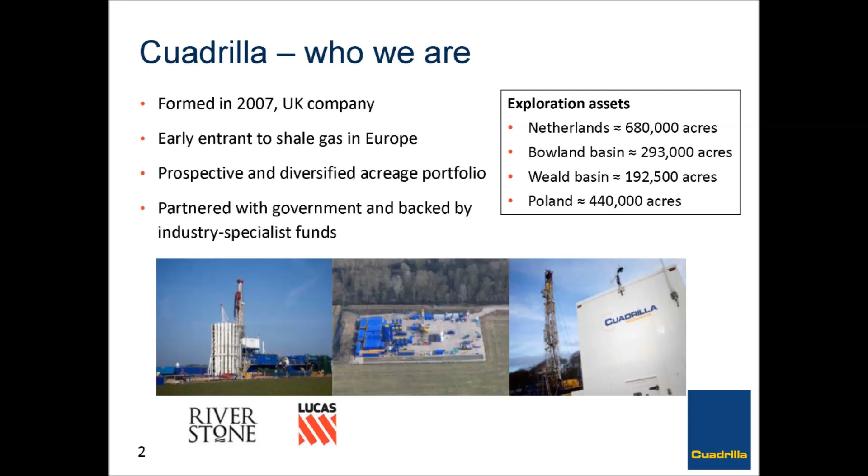Just briefly, I'll talk a little bit about what is unconventional gas or shale gas, why we are primarily focused on the Bowland Basin, a little bit on operations like drilling and fracturing, some of the environmental concerns and questions, and then a little bit on the economics.

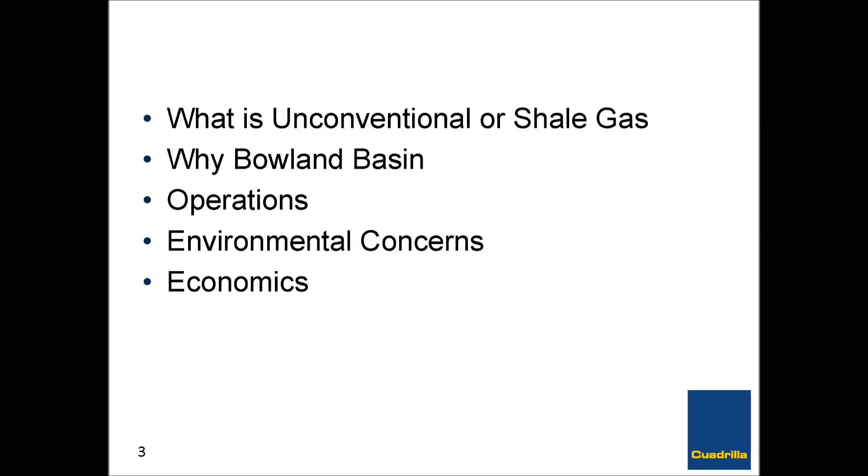So what is shale gas or unconventional gas? A methane molecule from a conventional gas well, if it came from the North Sea or one of the onshore fields, and the methane molecule from a shale gas well, it's the same thing. Shale gas is just natural gas. It just came from a shale formation instead of a sandstone or a carbonate. Basically, the reason it got its title unconventional isn't the gas itself, and it's not the way we drill or fracture or anything.

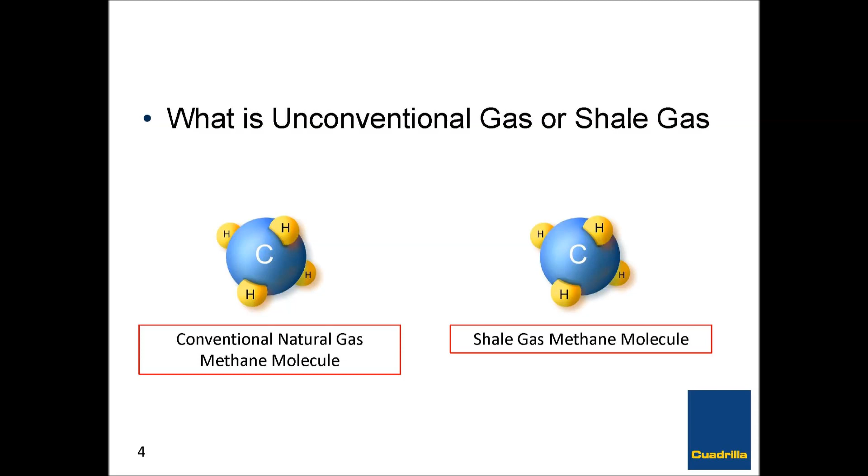That is not what makes it unconventional. What makes it unconventional is the source, the rock itself. So the geologists will know this is just a picture of a traditional trap that you would normally capture oil and gas in. There'd be some type of sealing rock.

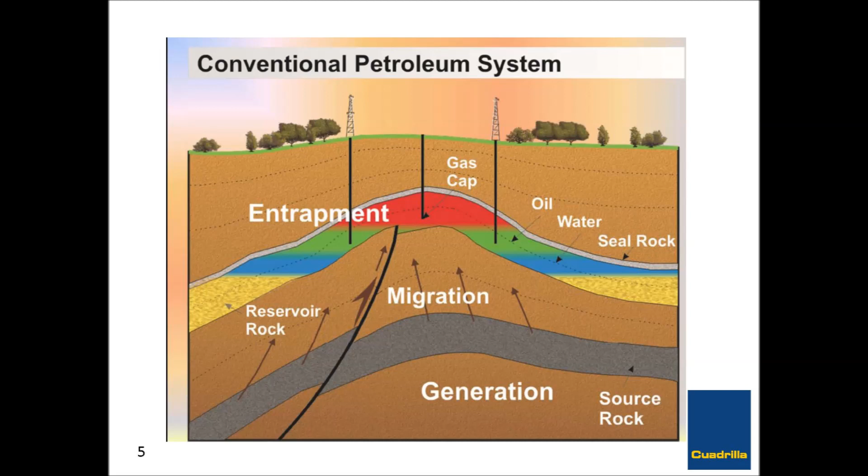The oil and gas would migrate from the source rock, which is usually something like a shale, and over geologic time it would get stuck up there, and a traditional well would drill into that, into a more permeable and more porous formation, whereas with shale gas, we're basically going after the source rock where the oil and gas was actually formed.

Just a quick picture of some shale and a methane molecule kind of to scale inside the matrix of the shale. Shale is extremely tight. Pavement stones outside are more permeable than shale, which is one of the reasons that traditionally they didn't produce gas or oil from shale. So it took us a long time to figure out how to create permeability in the shale so that we could get the oil and gas out.

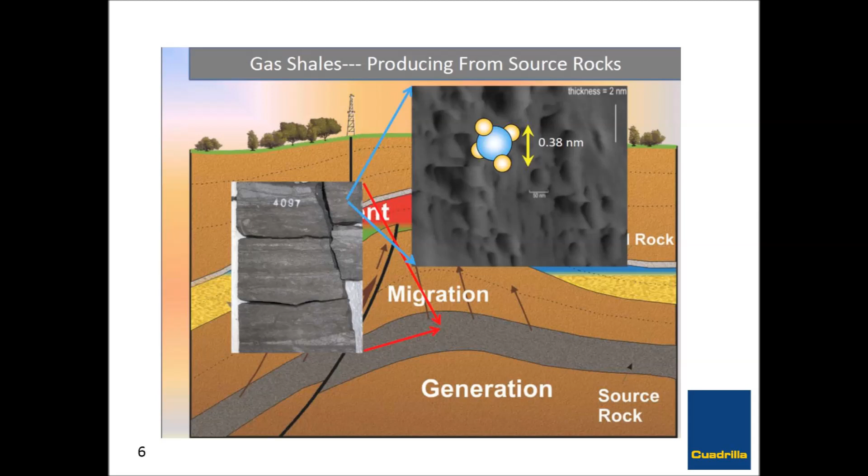Why do we target the Bowland Basin? If you look at the BGS study, this is from the BGS study of the shale gas resources in the UK, and our license is this section up here. So that's our Bowland Basin. That's where we've drilled the wells so far.

It's basically Blackpool and Preston there, and all these black boxes are the existing oil and gas licenses that are already established onshore in the UK. A lot of those are for either coal mine methane or coal bed methane, but there's some traditional oil fields and gas fields in there too.

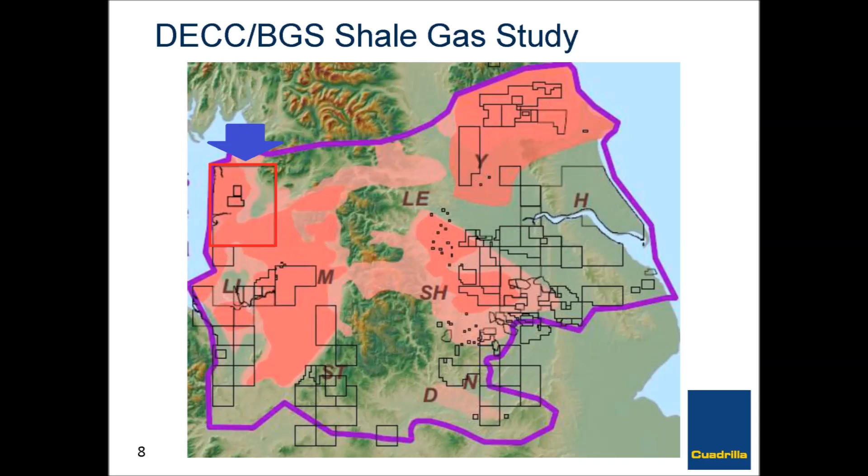This is just our license area. We picked it because it has the correct geology, so we knew that the shale was there. There was a lot of old 2D seismic that was run there. The age of the shale is correct. The depths that we thought before we drilled, from the public data that we could glean, are about right.

There were 4 wells that had already been drilled within this area. 2 of them had already penetrated the shale, so we could see the shale was there. We could see the gas contents and actually see some of the cores. And of course, there's a history of oil and gas production in that area. To the southern end, you can actually see one of the Formby wells there. There's an oil field in the southern part there. And then, of course, there's the oil and gas coming offshore.

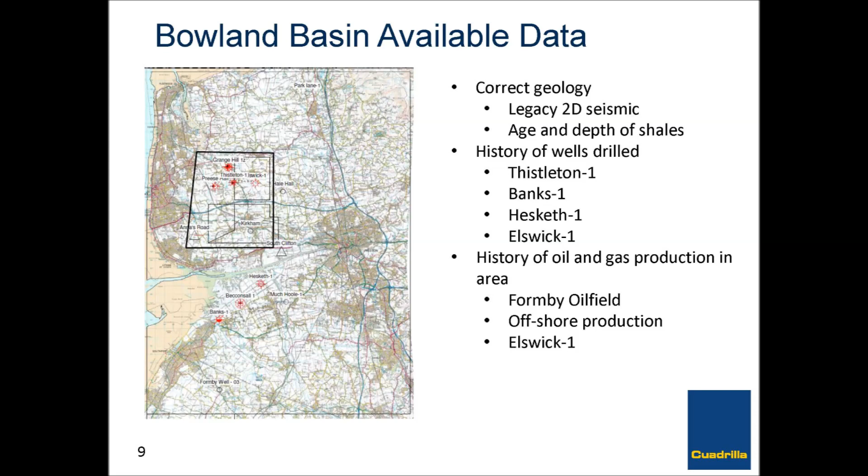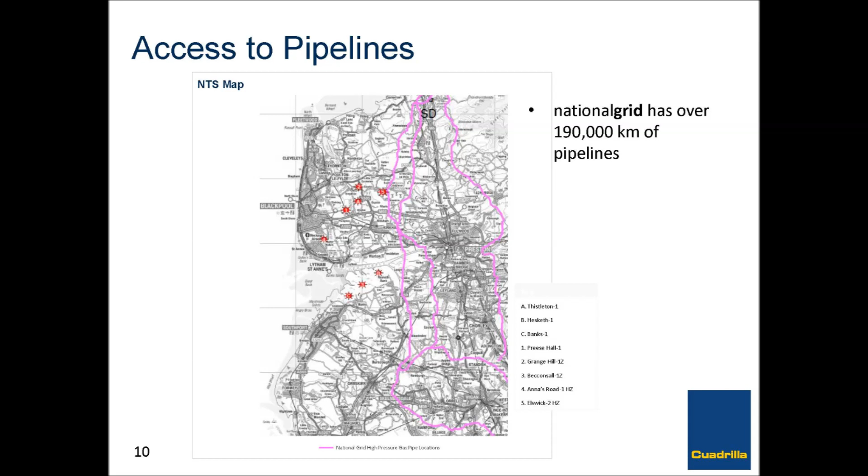One of the other key reasons is there are pipelines that run right through the middle of that license. Those are part of the national gas grid that loops around the country. So if we can produce gas from these wells, it's not too far to any of the pipelines to get it into the grid.

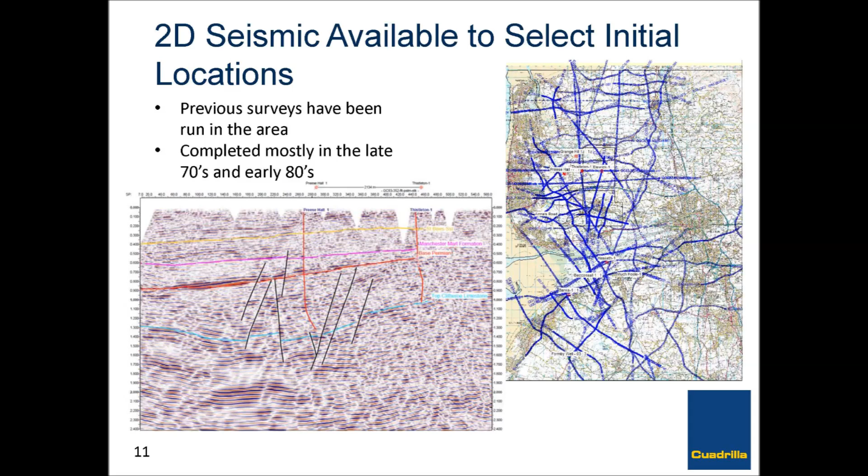There's just some of the old 2D surveys. And the blue lines on all that, those are all the 2D surveys that were done in the area, mostly in the 70s and 80s, I think.

Quick little bit on operations. So what we've done so far is drilled 3 wells, mostly around 10,000 feet, a little over 10,000 feet, to test mostly the Bowland shales. We've only had 1 well that penetrated the Bowland and went into the Hodder mudstone, which is a shale underneath the Bowland. We've also acquired about 100 square kilometers of 3D seismic, which gives us a lot better picture of the rocks. Some of the old 2D stuff, even with reprocessing, is still not the best quality.

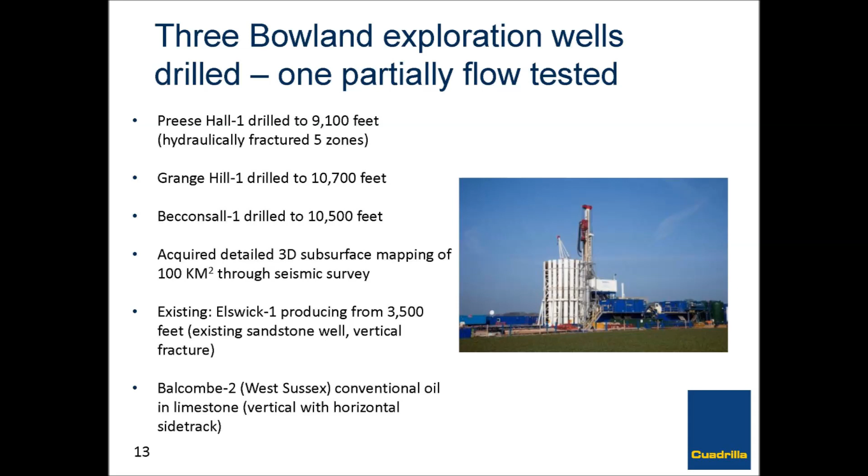And then the 1 well that was drilled back in the 80s, the Elswick well, is still producing a little bit of gas, and we've acquired that in the middle of our license there too. And then of course we have the well down here, which is different. It's not a shale gas well. It's a conventional oil well in a limestone.

So here are some pictures of the shale. So this is what shale looks like for the non-geologists here. One of the things that we look for in a shale gas well are some of the natural fractures. The problem with shale is it's too dense, it doesn't have any permeability, and really the only way to produce the gas or oil from it is to have a fracture network through it. We can only generate so much of a fracture with hydraulic fracturing. There has to be some type of natural fracture network in there too.

So the white bits in there, all this is some of the natural fracturing, and where basically calcite has formed in the natural fractures over time. One of the other things that we really look for is for those fractures to be going in different directions.

And you can see when we take cores, when we drill these holes, the wells that we've drilled so far are basically vertical holes, and the purpose is really to get the rock back to surface and look at it and measure how much gas is in it, how much organic content is in it, all that stuff.

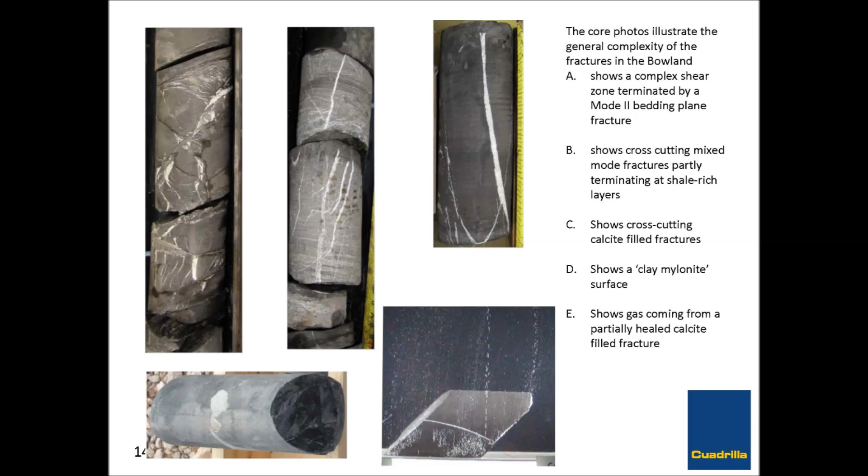But if you take the cores of this rock, to most people, if you look at the rock, you would never imagine anything comes out of it. But if you take it, stick it in a tank of water at the formation temperature, you'll see streams of bubbles start coming out. This one actually isn't even a very good sample.

So as I mentioned a little bit ago, we have been in the news. You see things about Cuadrilla, and you see things about other companies now. A lot of things on hydraulic fracturing, and usually you see pictures like this saying fracturing is coming to town. None of these pictures have anything to do with fracturing. Those are all drill rigs.

So whether a well is being fractured or not is independent of the drilling. This could be a geothermal well, it could be a conventional oil and gas well, it could be a deep water well. The rig itself is actually used for water wells in some areas of the world. So you see the article, and it has that. Fracturing has become this catch-all term for basically anything to do with oil and gas now.

And so it's interesting to someone that's been doing fracturing for over 30 years, and then you see something like that, it's like, well, that's not fracturing. I actually talked to a guy that has been a driller for 30 years, and he came up to me one day and said, for the last 30 years I thought I drilled wells, but apparently I've been fracturing.

The fracturing in the UK has been going on for quite a while, actually. Now the fracs changed. There's lots of different types of fracs. You wouldn't use the same frac in a shale gas well as you would in, say, a small carbonate or a tight sandstone well. So the picture of this frac was back in 1992. This is when I first came over and started doing fracs here in the UK.

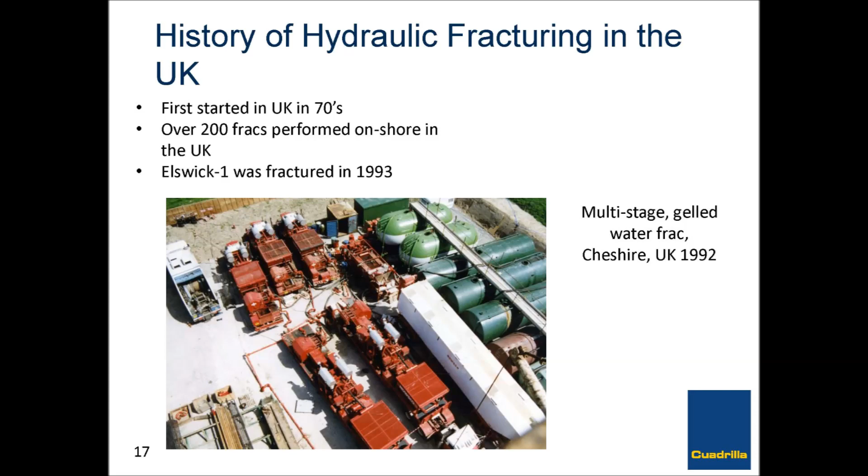The fracturing process itself, especially on high volume water style fracs that you do on these shales, is really just a big water moving exercise. We're pushing water down the well, and then out through some small holes in the pipe at enough pressure that it cracks the rocks, and especially where there's natural fractures in there, it'll start to follow those. And we're filling those cracks with sand, just silica sand.

It's actually mined here in the UK. So when we relieve the pump pressure, we stop the pumps, then when those fractures try and close back up, they can't close all the way, the sand's in the way. It squishes a little bit of the water back out, and then gas or oil can flow back to the wellbore.

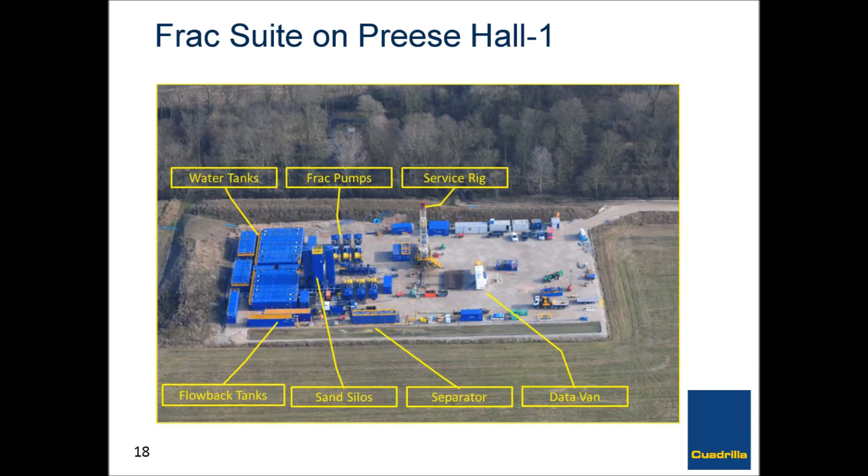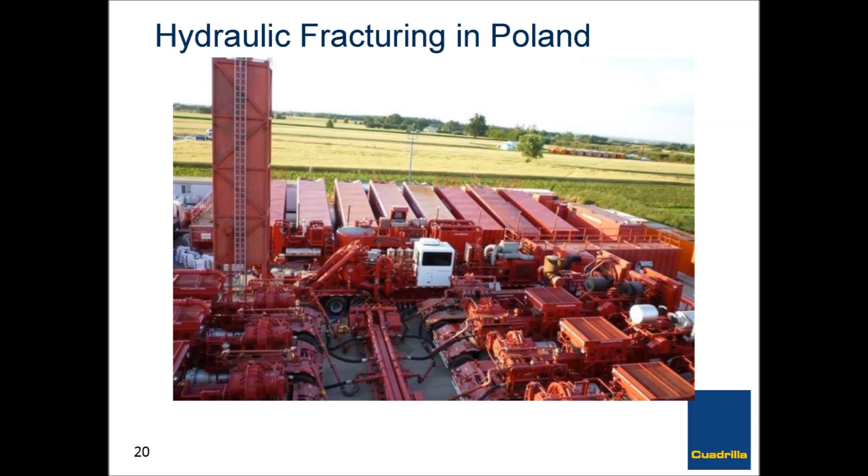And then here's a picture of North America. So one of the things that comes up all the time is you can do this in North America because you're in the wide open spaces, there's nobody around. So this is a frac just outside of Fort Worth, Texas, which is actually the home of modern shale gas development. So the county in Texas where they had started the modern shale gas is Tarrant County, Texas. It actually has a higher population density than Lancashire. So sometimes it is done out in the middle of nowhere in the U.S., but not always.

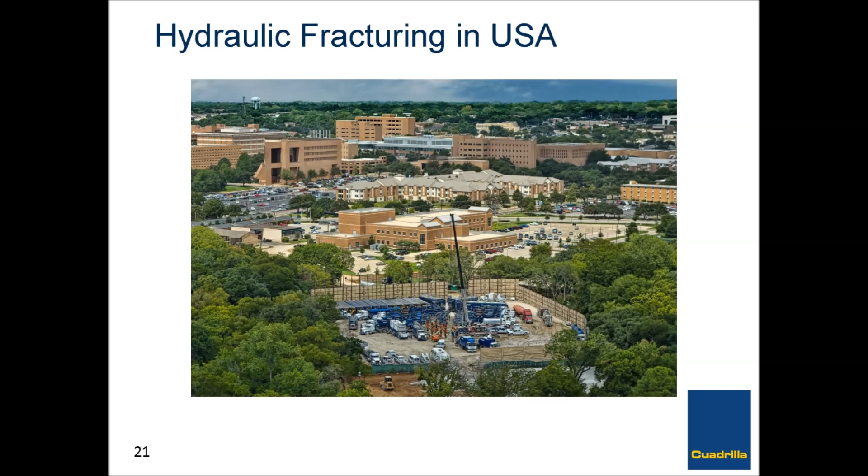When we do the fractures, a lot of people want to know where they go, how long are they, how tall do they get, and how do you know? Like, how do we know that the fractures aren't growing thousands of feet vertically and going up someplace where they can contact the water table? So one of the ways to do that is we can monitor them. It's basically called microseismic monitoring. We can monitor the microseismic activity. When these rocks crack, it makes enough noise that you can pick that up through either downhole arrays or from near surface arrays.

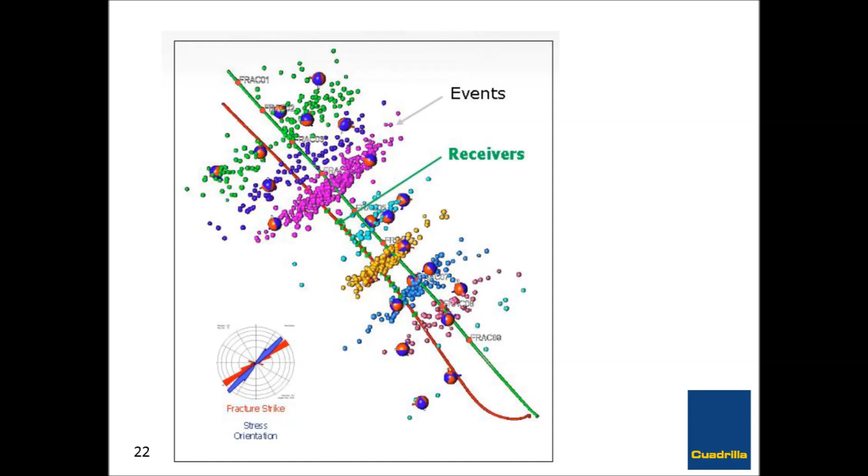So once you get to a certain shallow depth, the stress on the rock is such that if we inject in, instead of making a vertical crack in the rock, it's easier just to separate the layers and it'll just open that way, so you have a horizontal fracture at that point, which is one of the reasons it makes it very difficult for fracs to travel up to really shallow depths where say an aquifer is or something like that.

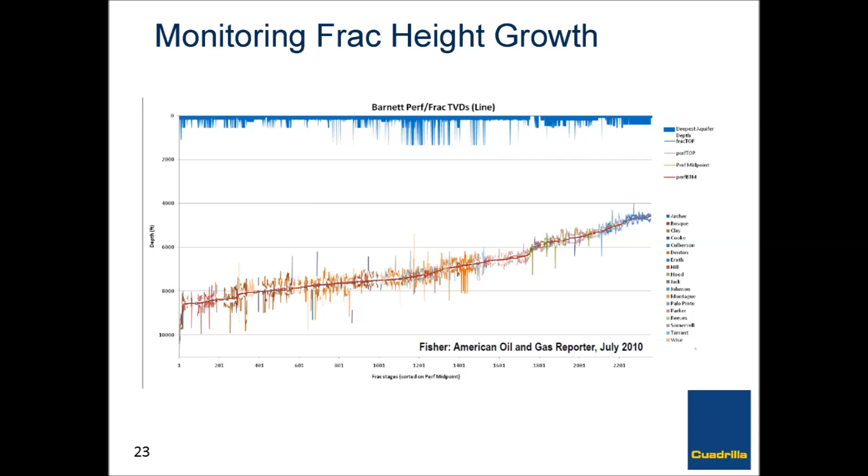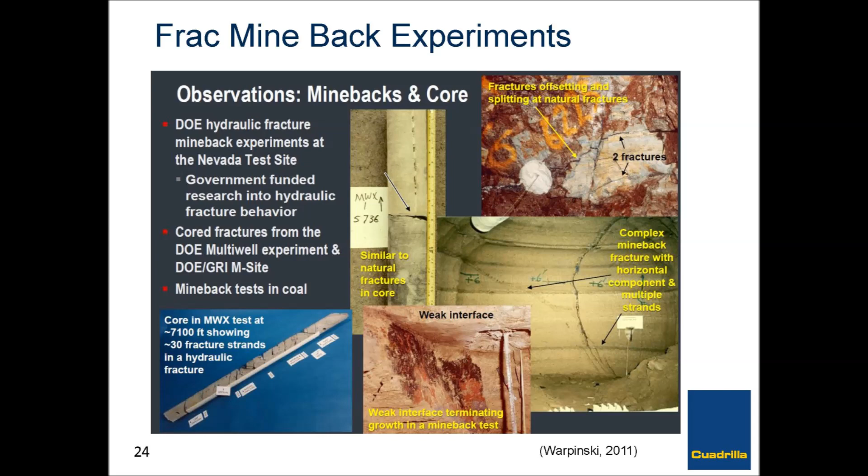Of course, we do a lot of stuff on water. And we hear lots of things, oh, fracturing is going to contaminate the aquifer, and taps are all going to set on fire. I mean, one thing, if you're on mains water, I can promise you your tap would never set on fire from hydraulic fracturing. Okay? There are some places in the U.S. that you can do that. You can light your tap whether there's hydraulic fracturing going on or not, but those are all people that have pretty much individual water wells that are coming straight into their house.

A lot of places, especially in Pennsylvania, some areas in Colorado, lots of areas where there's coal, there's already methane in the water, and normally when you put a water well in, you put a methane vent on it to keep it out of your house. But in reality, the depths that we work at in shale, the fractures that we create in shale, there's just no way they're going to come back up into a shallow aquifer.

From the measurements that we've seen, from the mine backs, we hope that a frac will extend a couple 300 meters away from a well bore, because the farther that goes, the farther apart we can put our wells, which means the fewer number of wells we have to drill, which of course is cheaper. And unfortunately, we can't get the fracs to go far enough that we can put the wells really far apart. If you can get a couple 100 meters each direction away from a well, you're actually doing pretty good.

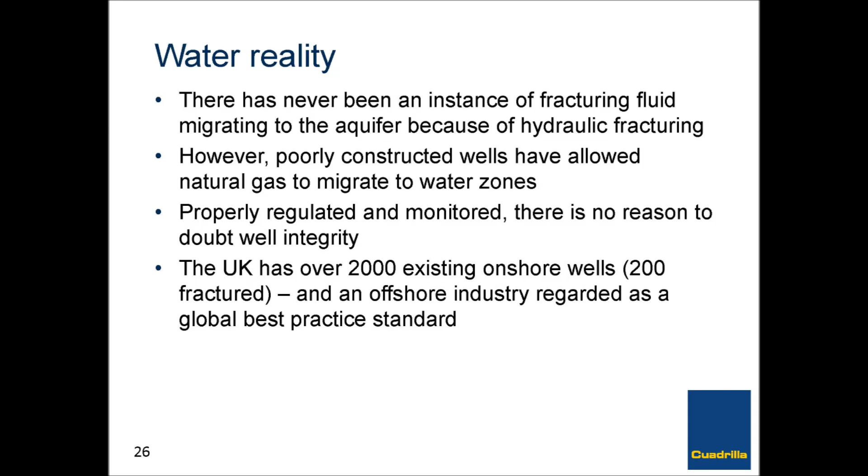The water that we use for fracturing, what we've used so far is just mains water, and one of the reasons for using mains water is it reduces the truck traffic. If you're on a site, you can get a mains line going into it. You don't have to truck any water in. It reduces truck traffic, makes us happy because it costs less, makes everybody around happy because there's less truck traffic around the site.

One of the other good things about mains water is it's already been treated for bacteria. One thing you don't want to do in an oil and gas well is put a bunch of bacteria down there, because they really like it and they can actually plug up your well. And so normally if we're using other water, then you would treat it with some type of biocide, just like they usually do with drinking water. You don't have to use drinking water. Again, it's basically because it's more convenient, and if it's available, we can use it.

You can use water from streams, you can use ponds, you can use seawater. I've used the effluent from wastewater treatment plants. It doesn't have to be perfectly clean water, you just don't want to have any bacteria in it. And for the type of fracs that we're doing, it's called a slick water frack, which basically means we're putting some type of friction reducer in water. It's one of the styles of fracs, I would say, that uses the least amount of chemicals.

And so the only thing that we're really putting in there is a polyacrylamide, which is just a long chain polymer. It's non-hazardous. And what that does is reduce the friction of the water as we pump it in down the pipe, so that it doesn't take as much pressure at surface, and it doesn't require as much pumping equipment at surface to push the water in.

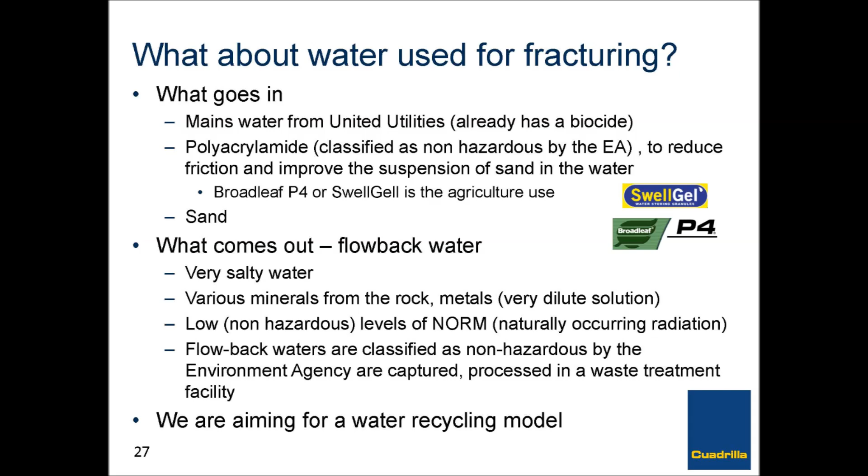Of course, you had the report from here, looking at the scale of shale gas and what would happen if this industry actually takes off and develops, and looking at the water use on that. And although we sort of have this reputation that we're going to use lots and lots of water, in the big scheme of things and in industrial use, it's not really that much. It's less than 1/10 of 1%.

Now, certain areas may have different water use restrictions than others. So in some areas there isn't very much drinking quality water. So if you can use brackish water or produced water from a well that wouldn't meet human consumption standards, we can use that water. Or like I said, seawater, effluent from the treatment plants, that's fine too.

One of the other things is you have to look at the other things that would use the water instead of shale. If shale gas or natural gas replaces coal, you actually use less water. Just to process the coal, not counting the actual power plant, but just mining the coal and cleaning the coal and sending it to the plant uses a lot more water than the same energy output you get from a gas well. And actually nuclear uses more water.

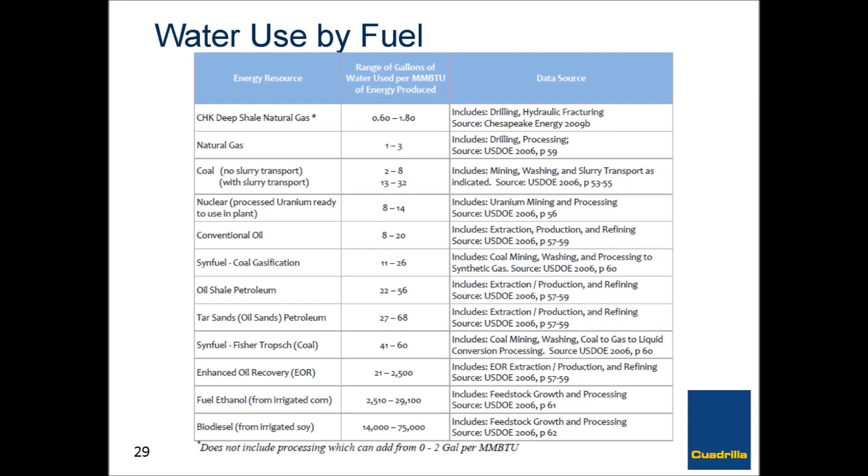And a little bit on economics, and also on why it's important to have natural gas, or in this particular case, natural gas from shale or shale gas.

One of the things that's happening here right now is the North Sea is on a pretty steep decline on natural gas and oil, and I think we're importing, it's like what, 50%? Is 50% the right number now? 50% of the natural gas right now is being imported. And that's expected to grow up to, I've heard 70 to 80%, depends on what study you look at, between 2020 and 2030.

And I think they said some bit on TV last night, and you hear in the newspaper and on the news, we've got to keep the lights on, and we have these issues with the power demand. And one of the things that's also happening here is instead of getting cleaner and greener with the energy, it's actually going the other way. What's happening is we're burning more and more coal.

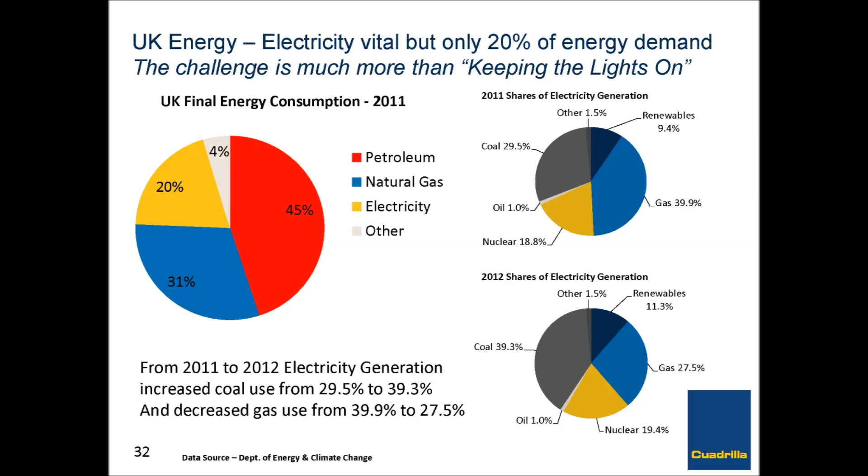So most of the gas is not used for electricity. Roughly, depending on the year and the number, it's a third for electricity, a third direct to homes for heat, and a third for industry. It's kind of a rule of thumb. You can see the exact numbers depending on the year. So what that actually means is if tomorrow we switched over to 100% renewable electricity, you're still importing gas, you're still taking money and sending it someplace else.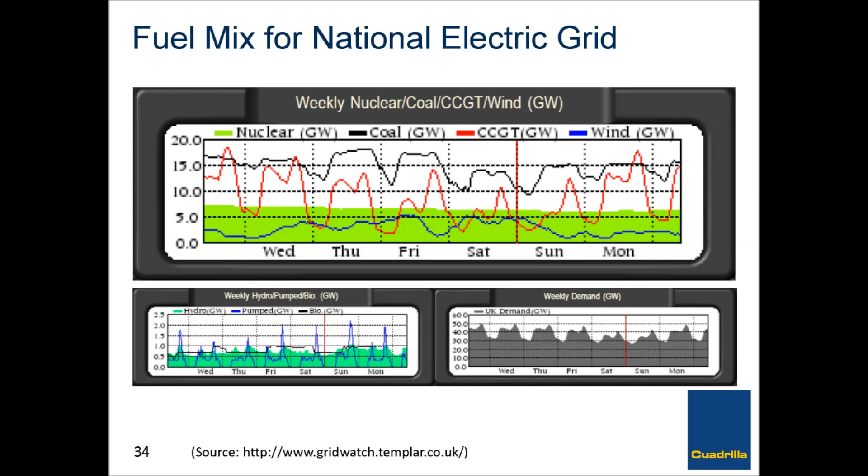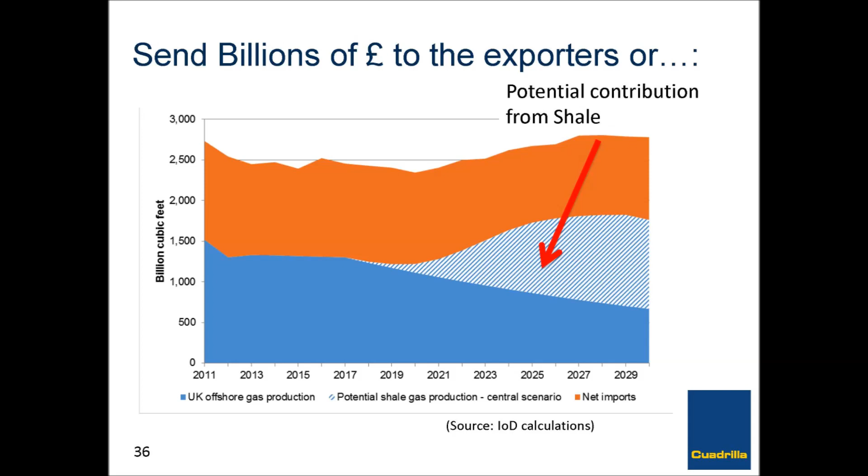Again, this is the same chart as before, and this is why the government is trying to push the shale gas industry, to try and fill some of that gap that is being spent on importing the natural gas. Quick blurb on the industry. We're not a subsidized industry, so you're not getting subsidies to drill shale gas wells.

If the Bowland Basin developed, probably about 50 billion pounds would be spent on that development. There are various different scenarios for jobs. The Institute of Directors peaked out at about 74,000. I think the lowest one I've seen is about 20-something thousand jobs. But they're all a little bit different. You have to really look close and see what they're measuring the jobs against. And obviously, if we can get to that type of development on gas, it will make a significant benefit to the energy security.

And then one of the other differences is if we produce the gas here, we're certainly under a lot more stringent controls. We want to have green completions, which means we don't vent methane, we don't have leaks of methane. Methane going straight to the atmosphere is a very potent greenhouse gas, so you want to minimize any emissions of that. And of course, as a gas company, we want to sell it.

We don't want to vent it anyway. But if it's completed in other areas of the world and you're importing it in, they don't necessarily have those standards. And technically, the size of these pads and the size of the development is small compared to other types of generation, per BTU to generate power.

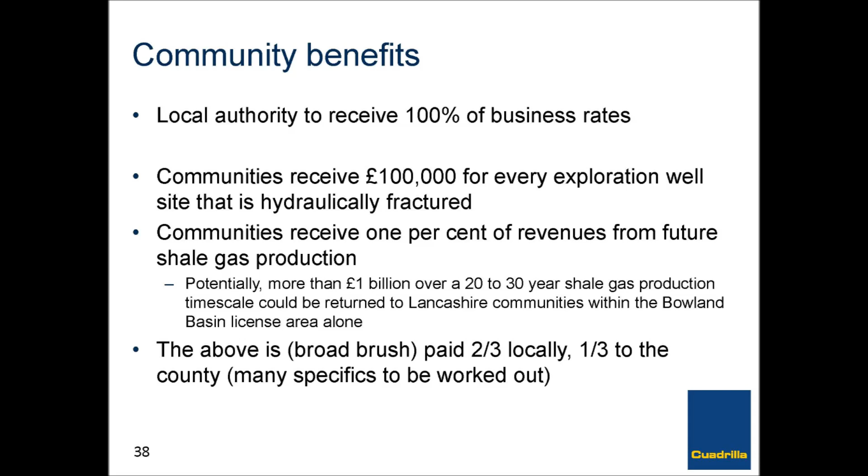Quickly, Cuadrilla, we're still early in exploration. There's a lot of stuff that comes out that shale gas is going to be the savior of the planet, and others that it's going to be the death of everything. And in reality, we don't know a lot about what kind of volumes are going to come out here. We're still in exploration. There may not be anything. So we don't know if this is going to be economic or not. That's why we're trying to do the exploration wells.

And it probably needs to be 20, 40 wells are the numbers that I've heard kicked around, to try and get some kind of idea of the economics on this and how much gas we will actually be able to get out of the ground. Will it be worthwhile? The industry is well aware of the risk. The wells are built basically the same as every other oil and gas well, the same standards actually as what we build in the North Sea. And again, it's the same as the wells that have been drilled onshore for a long time.

The benefits to the local community are a plus. And then one of the things that we're trying to do is talks like this and try and get more information out, especially in the areas where we're working, like up in Lancashire, we're trying to get more information out to the local stakeholders. And I'll zip it over to you.

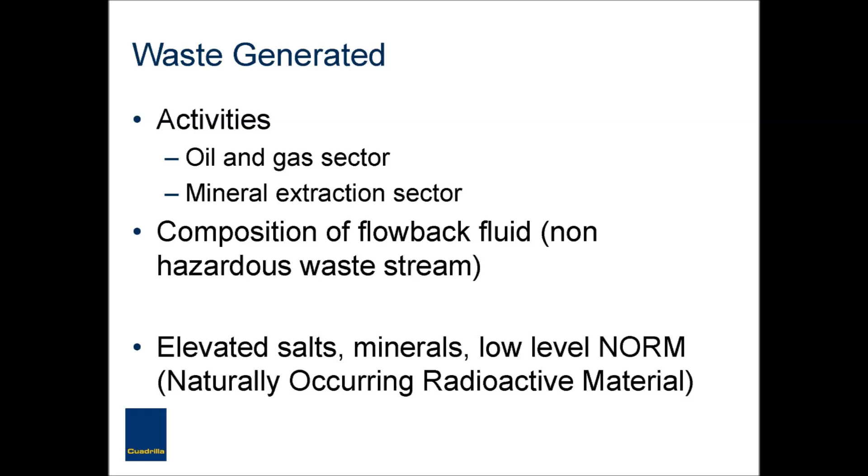Flowback fluid in itself is pretty much not a new phenomenon. Wastewater has been produced by the onshore oil and gas sector for a number of years now. Obviously we've got Wytch Farm in Dorset, one of the largest onshore oil and gas facilities. According to DECC figures, there's 93.8 million barrels of produced water, exactly the same properties, saline, minerals, it's got NORM in it. Conventional wells tend to use this water to re-stimulate so they can re-inject, but the vast majority of that would go to treatment plants, onshore treatment plants receiving North Sea flowback fluid as well.

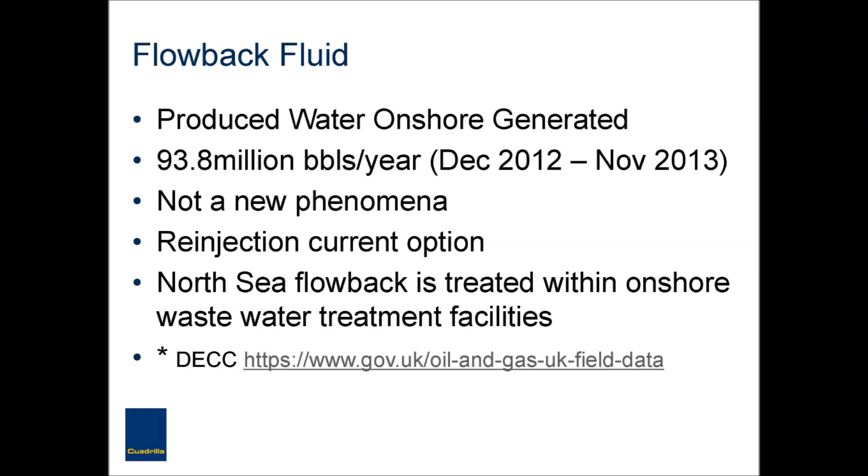We're working with a contractor at the moment for disposal facilities, and he's assured me that about 100 to 120 tonnes per month goes through his treatment facility. So again, it's not a new area which the industry needs to tackle. It's just more probably getting the perception over to the public.

Okay, so regulations. I could probably draw about 20 slides on the regulations that apply to the oil and gas industry onshore. These are the key ones which we're working on at the moment, but there are other ones on there which you'll find on most construction sites and other developments.

So environmental impact assessment, initially this wasn't a requirement for the industry, but Cuadrilla has taken a position, and this has now been firmed up by the European Union, that if you're going to carry out hydraulic fracturing operations, you will need to do an environmental impact assessment. We've employed Arup Consultancy to carry that out as a position of objectivity, not a position of advocacy.

So they'll be doing a series of modelling and analysis of a number of chapters, so archaeological, radioactives in there, waste management, resources, air quality. They will then issue the EIA for submission to the local authority, and that goes through a 4-month consultation period, so quite an intense process.

Within Cuadrilla itself, one of my principal positions is to apply to the Environment Agency for EPR regulations permitting, so that's the mining waste, radioactive substances and an IED. For the mining waste, this is really concerning that whole discussion we mentioned earlier about does it fall under the mineral sector? Yes, it does, so the mining waste applies, and this deals with all extractive waste streams. So you're looking at drilling muds, cement, but also the flowback fluid.

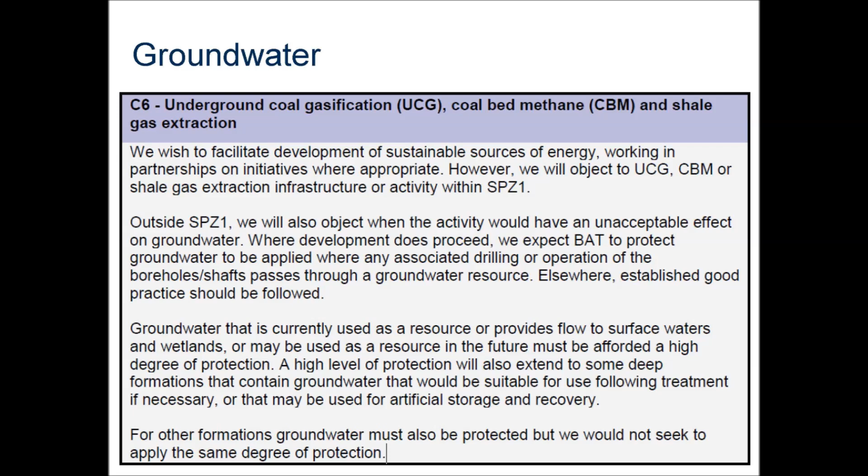Then when we've got a full high-level environmental risk assessment, we then submit that to DECC, not for approval but for assessment. And then we move forward into the full environmental impact assessment. Now, I'm not aware of any other industry that has to do that, an ERA. You can build a nuclear power station, but you don't need to go through an ERA process. So this is quite unique to the industry.

Okay, so in terms of waste management hierarchy, we're always looking at ways to prevent the flowback being generated in the first place. Eric touched on a few prevention methods using alternatives. Propane's one of them. Difference being between propane and water, you can't really pipe propane into the site. So again, that increases truck traffic, so we need to balance up the pros and cons.

In terms of optimisation, reduction, what that means is basically do your desktop research, understand the geology, carry out the 3D surveys, look where you're going to focus your hydraulic fractures, understand how big those fractures could potentially be, and then that will probably give you a good indication of how much water you need to inject.

Reuse, we're currently looking at this in quite a lot of depth, and we are talking with the Environment Agency. Tends to be that we are going down the route of reusing flowback fluids during hydraulic fracturing stages. So this basically eliminates all flowback going off-site, which is a big win for the industry. Recycling, again, as Eric touched on this, we are seriously looking at this with a number of contractors. I'll touch on a case study as well over in the States, which looks at recycling flowback fluid.

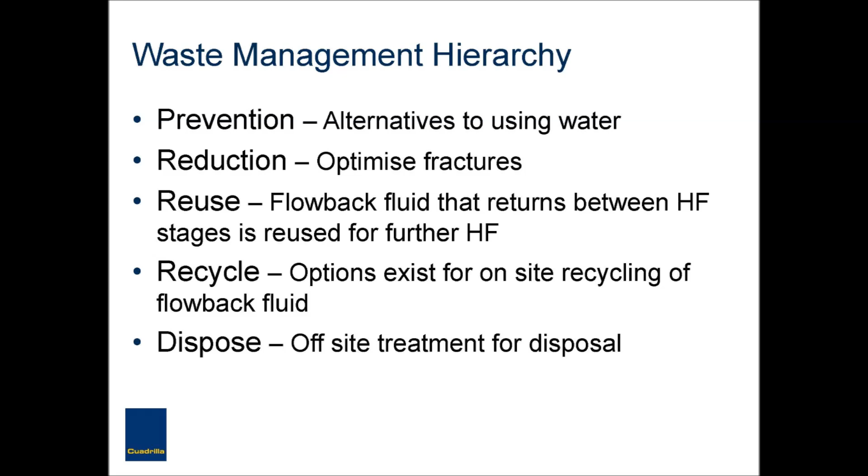Again, we can control that flow. If we get a lot of flowback, Eric and his team can control those flow rates, and we can store flowback on site. So it's not a process which just freely flows back. It is a controlled process. Then over a period of days, it settles down into very small quantities that flow back. Then hopefully there'll be a transition period. This is where the gas kicks in, and that's when obviously we start supplying that into the mains.

At Elswick, we probably empty the flowback tank about 4 times a year. That's been going since the mid-90s. So very small quantities of flowback fluid are created.

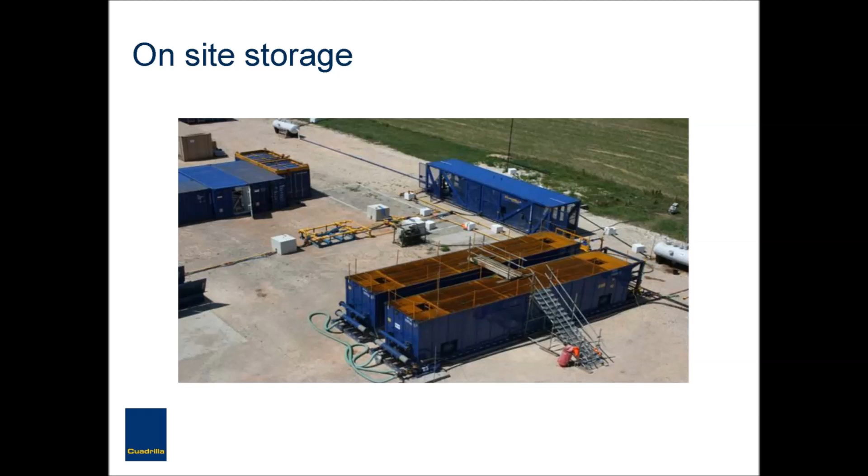You'll probably have a sand bin on site to get any of the return sand, and a condensate bin as well. And then the flowback simply goes into these tanks here. We don't use any open lagoons, which has been practiced over in the US. We use steel flowback tanks. And this is located on an impermeable membrane as well, so that provides the secondary containment. Now you can also get flowback tanks which are double skinned, so then you're getting into tertiary containment as well. And that's what it looks like.

So as I mentioned, we've got a number of off-site disposal facilities. They again have to meet EPR regulations under Waste Management and RSR. And again, we have to make that link during the EIA process and also during the RSR process to say that, yes, we're going to produce it, we're going to manage it on site in accordance with the permitting, and by the way, we've also got the off-site facilities which are permitted.

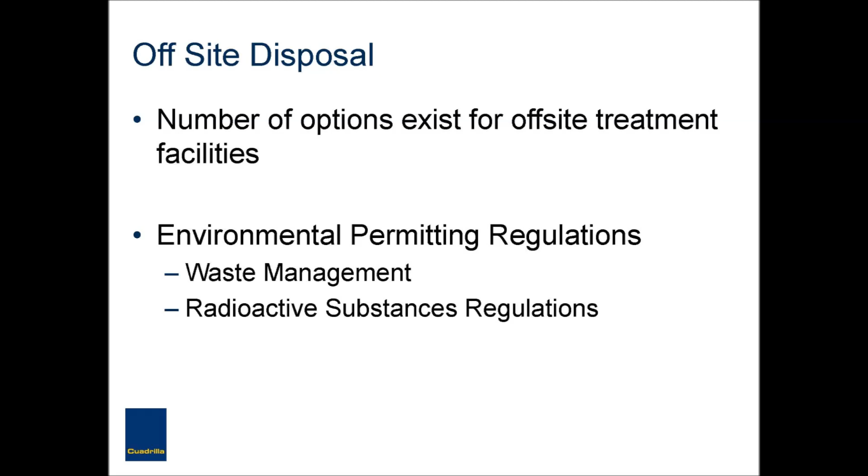On-site treatment, so as I mentioned, we are looking into this. There's a number of technologies that exist: flocculation, evaporation, ion exchange. It's readily used over in the US now, so it's something which Cuadrilla is pursuing, and it should basically be normal practice. However, we still need to go through the process of getting regulatory and social acceptance to say that we're going to start treating waste flowback on site. We still haven't broached that one with communities yet, so we need to go through that process of education, making them understand, listening to concerns and taking them on board.

So in terms of a case study in the US, sorry, apologies about my geography, I've said case study in the US and it's a case study from Canada. Thanks.

So there's a company called Apache. They're pretty much leading the way in terms of environmental management and their credentials within this field. They're operating the Consort field, which is quite a remote location in Canada. They've got no access to a large supply of water or mains water, but within the local vicinity there was a village, and they realised it was producing waste effluents, about 19,000 barrels per day. So someone within Apache had a great idea, saying, well, let's utilise that as a hydraulic fracturing fluid. So they employed a mechanical and chemical treatment works, which cost them about $400,000. They then cleaned up the waste effluent and injected that into the formation, and they reckon on the whole it saved them about $1.4 million overall.

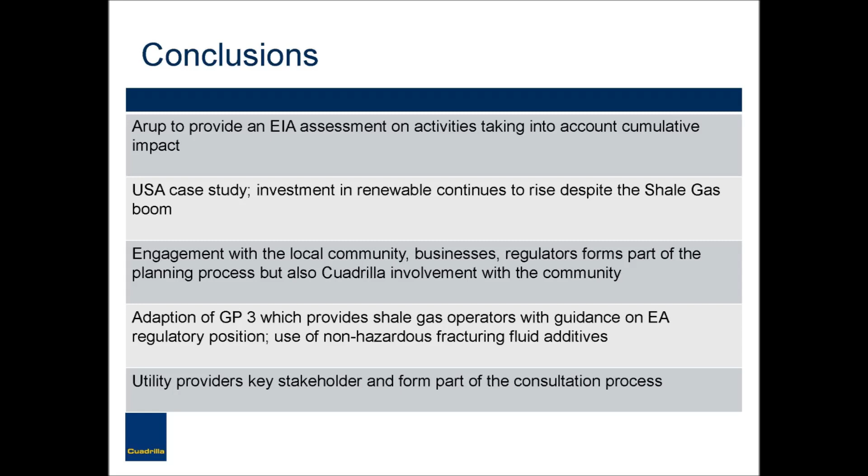Also, as Eric was talking about, we do install a microseismic array to monitor hydraulic fractures, understand the growth, understanding where the faults are, etc. Sorry, that's from the 3D seismic, but monitoring the hydraulic fracturing gives us that ability and confidence to let the community know where the hydraulic fractures have gone. We do commencement of baseline data before operations. That's probably protecting ourselves, but it's also a good demonstration that when we go back to P&A the well, we've restored it to its original conditions.

There's a lot of guidance out there. We operate to UKOOG guidance as well as Environment Agency pollution prevention guidelines, and that will be demonstrated through our management plans, which will be submitted in the Environmental Impact Assessment. And as I've mentioned numerous times, we are actively looking at recycling and reusing water. And again, technology is readily available, so it should be happening here very soon.

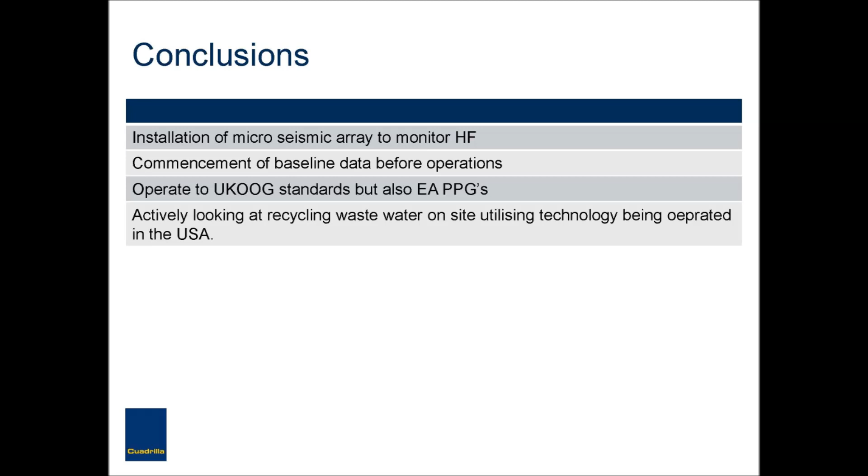What I just wanted to conclude on is a comparison. At the moment, there's a site going through an EIA process and permitting. As you can see, the site is located here. This is a geothermal well. It's in the centre of Manchester. They're going to be drilling down to about 3,000 feet, 2 wells. They'll then do some laterals, about 500 metres. They're installing a microseismic array, and they'll be stimulating the well, obviously, to get the geothermal fluids coming to the surface. Sounds pretty similar to hydraulic fracturing.

But socially acceptable. It's right in the city centre, in communities, and it's going ahead and has the same hallmarks of what we're doing. So there's a few pros and cons in trying to get that message across to communities, but clearly education is the way forward for us to promote the message, because these guys are doing it in the centre of Manchester, and I think if we turned up in the centre of Manchester and said we're going to hydraulic fracture there, there might be a few concerns.

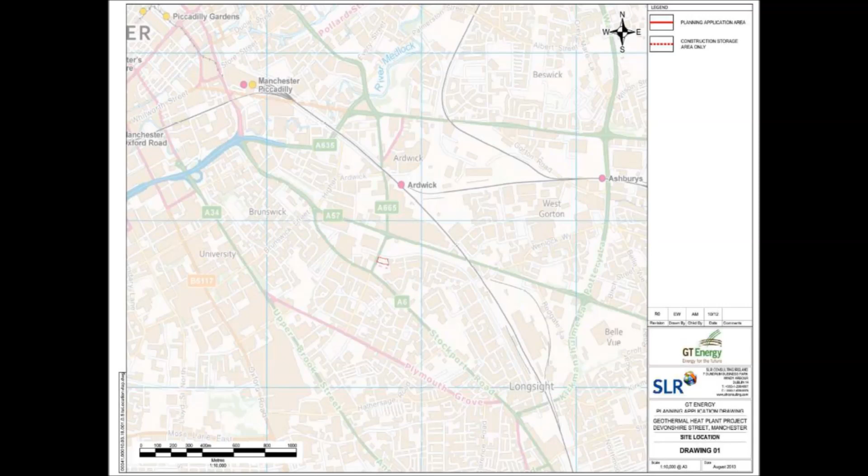Okay, so that's the presentation. I know I've probably just touched on a small area of environmental impacts, etc., but I guess we can explore more in the Q&A session. Okay, thank you.